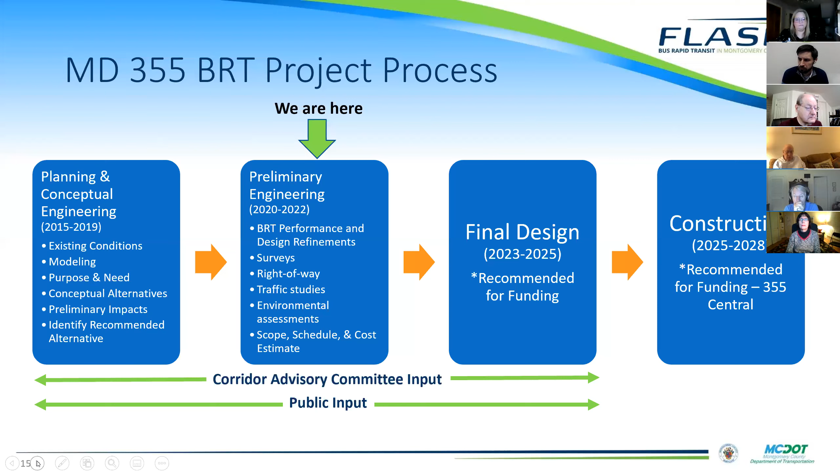So we've seen a slide a little bit like this before, and here we are in the preliminary engineering box doing all of this work - design refinements, performance refinements, the surveys, the right-of-way, the environmental and traffic analysis, scope, schedule, and cost estimate. The next two phases would be final design and construction, which we have recommended for funding in the latest budget. As I said, we will discuss this later on in the presentation.

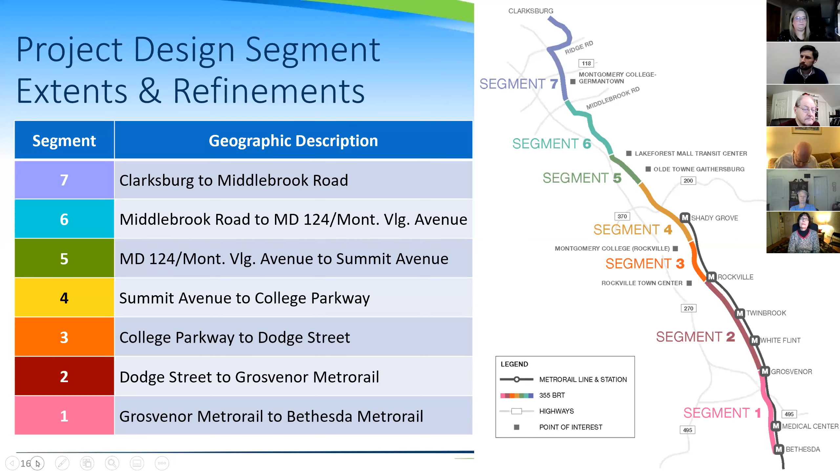So what have we been doing since last April? We've been doing a whole lot. We completed the 15% design phase in July, and we began moving toward 25% design, which is targeted to be completed in April. We completed multiple technical studies to refine the transit service and infrastructure design.

Some of the things we've worked on include coordination with the State Highway Administration on removal of some of the free right turns along the corridor. That is a charge that the county has been taking on in some of the locations to head towards the Vision Zero objective of reducing pedestrian accidents in the county.

We've also been working with Montgomery College and Montgomery County Public Schools on a transit center location near Montgomery College, Rockville. We've been working with the city of Gaithersburg regarding the Lake Forest Transit Center's ultimate configuration and coordination with a future development that may occur in that location. And we've been working out the details for the potential interim terminus station location at Montgomery College, Germantown.

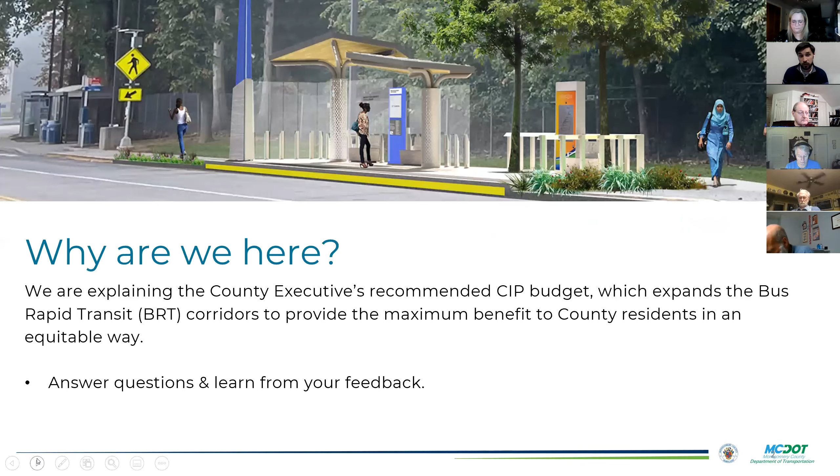There's some budget meetings that are getting ready to come up as the council takes up the county executive's recommended budget. So we wanted to spend a little bit of time tonight in advance of those meetings, walking through the recommendations in the budget and what that means for a number of BRT projects, and answer any questions that people might have. So that's why we're here. I don't think we need to belabor the point about what the flash system is. We've talked about that numerous times in previous meetings, the various aspects of the service. I think we're all familiar with that.

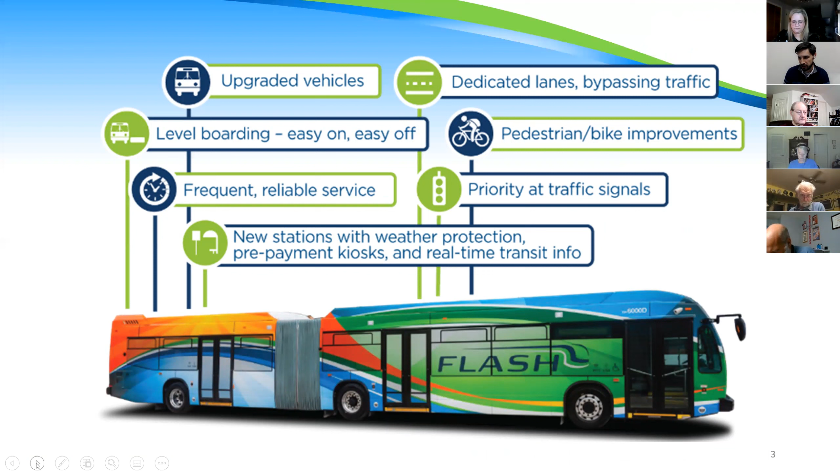In terms of the capital improvement program as it relates to bus rapid transit in the county for the proposed 23-28 budget, there's a recommendation to advance final design and construction for the Veirs Mill Road Bus Rapid Transit project, as well as the Maryland 355 Central project. We're also proposing to advance final design on the pieces of the project called Maryland 355 North and South. So the entire project is being recommended to move into final design, but only a portion of the project is being recommended for construction.

We've actually started planning. Those studies are just getting underway now, but planning is funded for New Hampshire Avenue, as well as the North Bethesda Transitway. We have funding programmed to advance preliminary engineering on what we're calling our US 29 Phase 2. This would look to get more dedicated bus facilities along the US 29 corridor and provide improved performance for the flash service that's already operating there.

There are also two related efforts happening in the county. One is called the Great Seneca Transit Network. This is a network of routes that would connect the Shady Grove Metro with the Life Sciences Center, the universities at Shady Grove, and areas around Shady Grove Adventist Hospital that were supposed to be served by the corridor cities transitway that just isn't moving very quickly. So this is an interim solution to provide improved service to that part of the county, and we have received design and construction funding for the first two routes of what would be a 4-route network over there.

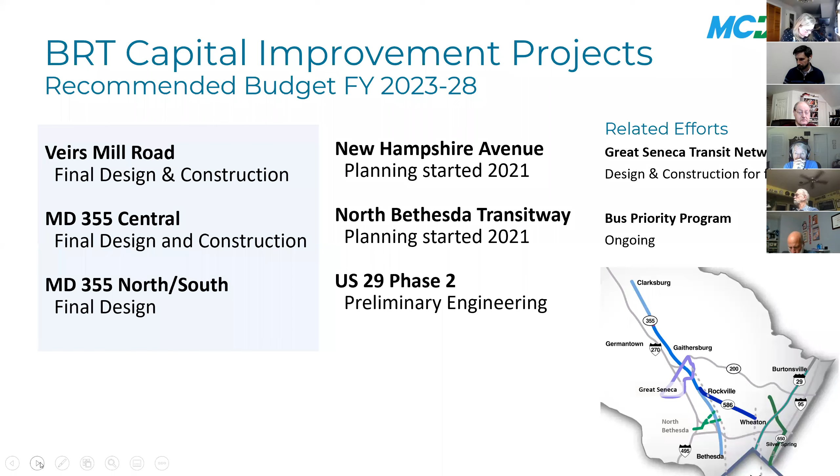So I'm going to start with just kind of an overall project benefits of what we see coming out of the budget recommendation, focusing specifically on the Maryland 355 Central and the Veirs Mill Road projects. These projects together will improve access and link key locations and activity centers, including Montgomery College campuses, a number of high job centers, healthcare locations, housing, as well as Metro Rail and MARC train. They'll serve existing communities as well as strengthen connections to areas that are planned for future growth that is planned for transit-oriented growth.

The recommendation does align very closely with recommendations that are coming out of the draft corridor forward plan, as well as the Veirs Mill corridor plan and the county's climate action plan in terms of the services that are recommended in those documents.

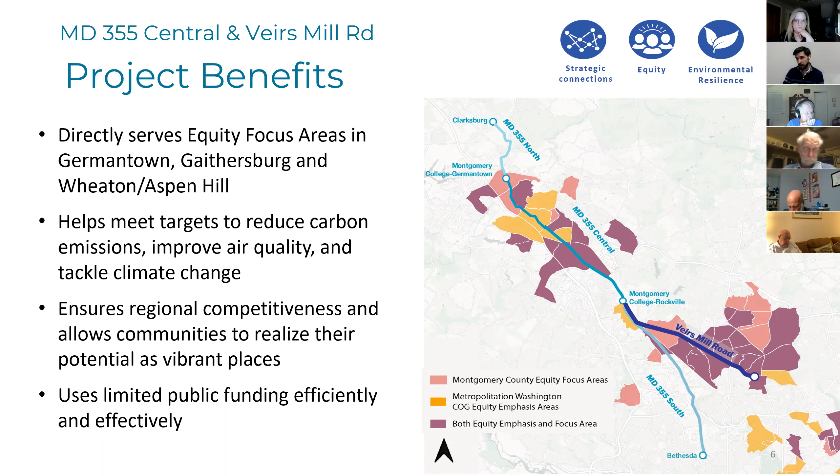Both the Veirs Mill Road and the Maryland 355 Central project directly serve equity emphasis areas in the county around Germantown, Gaithersburg, Wheaton, and Aspen Hill, as you can see on the map displayed here on the right. The projects will help the county meet its targets to reduce carbon emissions and improve air quality, as well as tackle climate change. It helps ensure regional competitiveness and allows communities to realize their potential as vibrant places. And as we'll see in a couple of slides when I walk through the various funding sources that are proposed, it uses limited county public funding efficiently and effectively.

I know this is a 355 CAC meeting, but this project does overlap with the 355 corridor for a small portion. The recommendation is for final design and construction of the Veirs Mill Road BRT, which will connect Wheaton and Rockville, tying into both lines of the Metro Rail Red Line. We'll look to improve travel time through signal priority, dedicated bus lanes, and queue jumps along the Veirs Mill Road corridor.

As I'd mentioned previously, it does border a number of equity emphasis areas in the county with a concentration of zero-car households, and the corridor carries the top metro bus routes in the county. The project, just like the 355 project, is looking to increase safety and access by removing free rights and redesigning some major intersections along the corridor to improve safety, as well as adding new bike and pedestrian connections by combining this project with our Veirs Mill Road BiPPA.

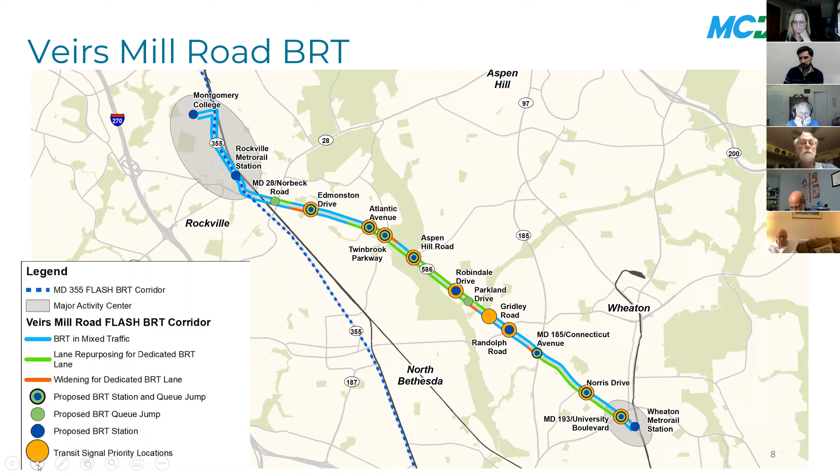This is just a little bit more detail about the Veirs Mill Road project. You can see the areas identified for dedicated bus lanes through repurposing of shoulders, queue jumps, and transit signal priority.

So the 355 BRT, as I mentioned, we're looking to advance final design on the entire 22-mile long corridor as soon as we complete preliminary engineering. There is funding for construction on what we're calling the central section of the project, and I have a slide on that coming up here.

To do dedicated lanes, again, where feasible, through a combination of 2-lane segments as well as single-lane median segments. There are some areas where there are no dedicated bus lanes, and the bus would run in mixed traffic. These are areas where the constraints are just too limiting to widen the road further, primarily in the southernmost sections in Bethesda, or in areas where the congestion is lighter and not warranting an investment in dedicated bus lanes.

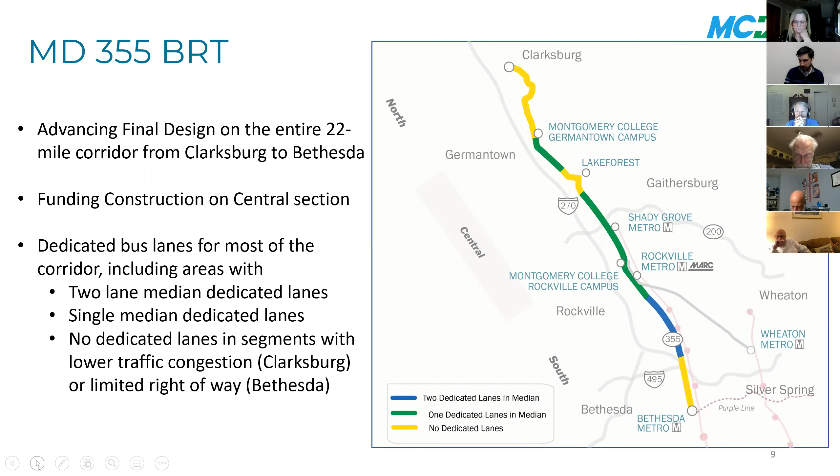So the 355 North and the South are combined into one capital program for the time being. The north would be the piece north of Montgomery College in Germantown up to Clarksburg. The southern portion would be from Montgomery College in Rockville, south to Bethesda. So we would be advancing final design on both of these segments, assuming completion of preliminary engineering.

And the reason that these two pieces are not funded for construction is there are limited funding dollars available for construction. Given the project complexities that we see in the south, as well as the still emerging land uses in the north, we feel the greatest benefit of those limited construction dollars are in the central portion of the corridor.

The county is continuing to look for additional revenue streams to fund construction. So by advancing final design, we'll have the projects ready once those additional construction funds can be identified. In the interim, the plan would be to redeploy the Ride On Extra service to better serve the southern portions of the corridor, and also look for opportunities to implement new express buses to connect those commuters up in the north to the Metro.

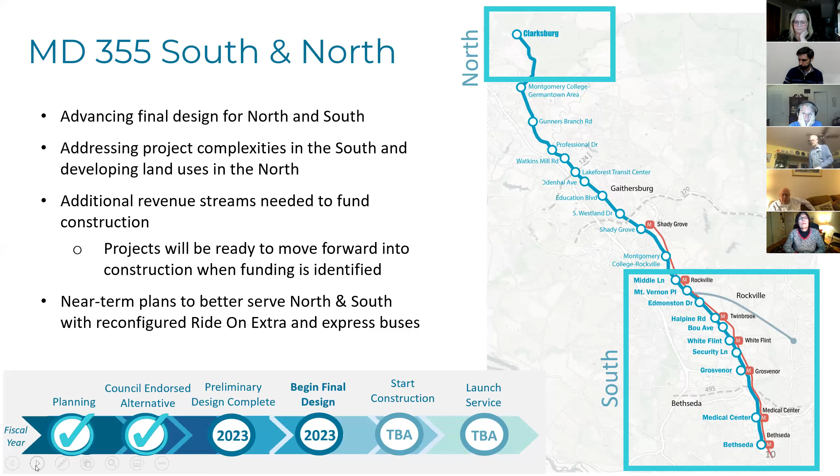The 355 Central project would look to advance final design and construction on what is an approximately 10-mile long corridor between Rockville and Germantown, with the various bus lane configurations that I showed on the previous slide. This area runs through a number of equity emphasis areas in the county and has a concentration of zero-car households, as well as the highest existing ridership for Ride On, which is the Route 55. It would expand connections to job and healthcare centers, 2 community college campuses, as well as the MARC train and the Metro Rail for a portion of the county that's not currently served by Metro Rail.

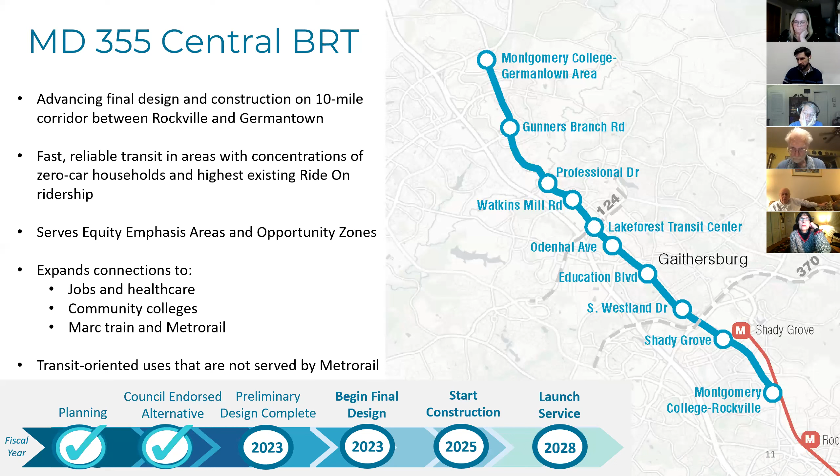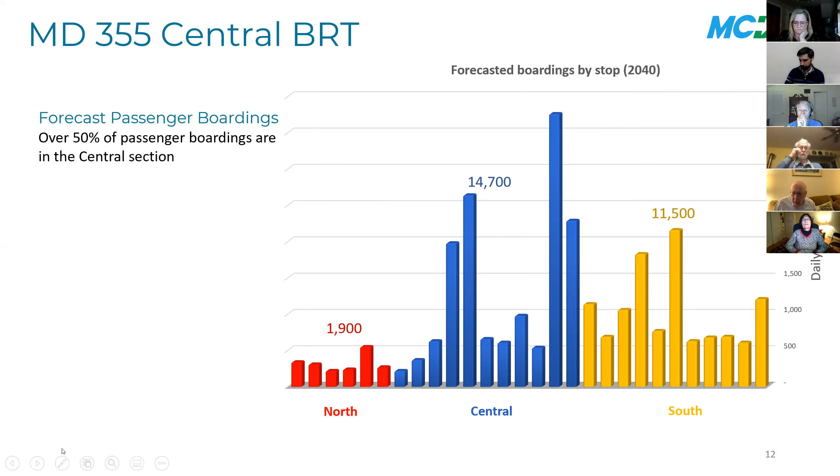Just a little bit of the data that's backing up these decisions. So when we look at the forecasted boardings for the BRT routes and break it up into the 3 segments that have been identified, what we see is that over 50% of the boardings are forecasted to occur in the central portion of the corridor. The remaining 40-ish percent would occur in the south, and then about 9% occur in the north. The other thing we see is when we actually look at the passenger loading.

This is a little bit different than just straight boardings. This is looking at how many people are riding the bus at any given location along the corridor. Not surprisingly, we see passengers boarding the bus as the bus leaves the north. But what we really see is that when you hit the central section, and really around Lake Forest Mall, we see a massive increase in the loading of people getting on the bus. Then again at Shady Grove, not surprisingly, when people transfer to the Metro to then access the broader region, we see a drop. Then departing Shady Grove Metro and heading into Rockville, White Flint, and Bethesda, we see kind of a static level of ridership. So these would be people getting off and on in the corridor, doing intermodal trips, connecting to destinations, in between Metro stations.

But there's a static, steady level of ridership. Still critical and important to serve, but not nearly as high as the demand trying to access the metro stations from points north that don't currently have this level of transit service.

The Route 55 is the highest ridership route in the Ride On system, and based on the latest figures from the transit division, it has almost returned to its 2019 pre-COVID ridership levels. So there's still high demand for bus ridership in the corridor. Route 46, which serves the southern portion of the 355 corridor, has about half that ridership—still strong, one of the higher ridership routes in the system, but about half of Route 55.

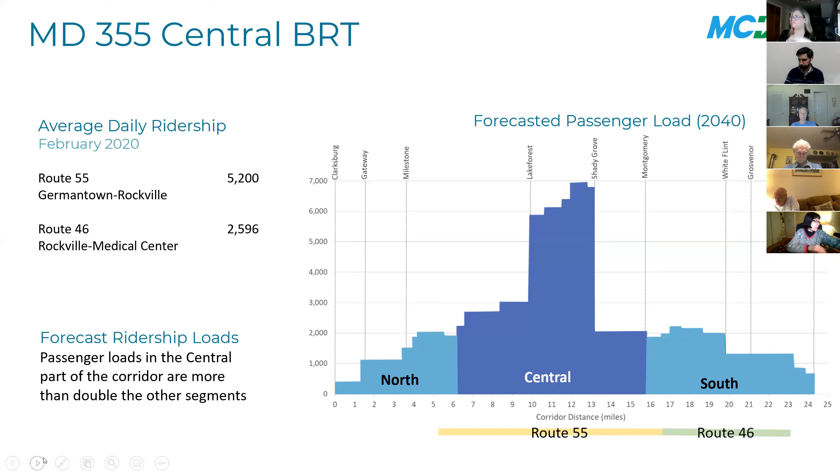A little bit about the funding sources going into the Veirs Mill Road BRT and BiPPA, as well as the Maryland 355 Central BRT. We're assuming 50% of the funds would come through federal grants, which we'll touch on next. We're also assuming agreements between the county and the state, relating to the state's opportunity lanes or toll lanes project on I-270, which commits funds toward high priority transit projects in the county, would fund the majority of the other portion. There are also some other local and state sources tied into these projects. But the primary share would come from outside county sources funding these two projects, with the Veirs Mill BRT and BiPPA project at about $94 million, and the 355 Central project at about $314 million.

The federal grants come from the Federal Transit Administration's Capital Investment Grant Program. There are two primary grants we'd be seeking: New Starts and Small Starts. The requirements for each are tied to project costs and project type. New Starts requires that 50% of the project be in dedicated bus lanes, which the Veirs Mill project would not meet. However, the Small Starts program doesn't have that bus lane requirement, and projects submitting for Small Starts funding must be under $400 million, but not seeking more than $150 million in the federal share.

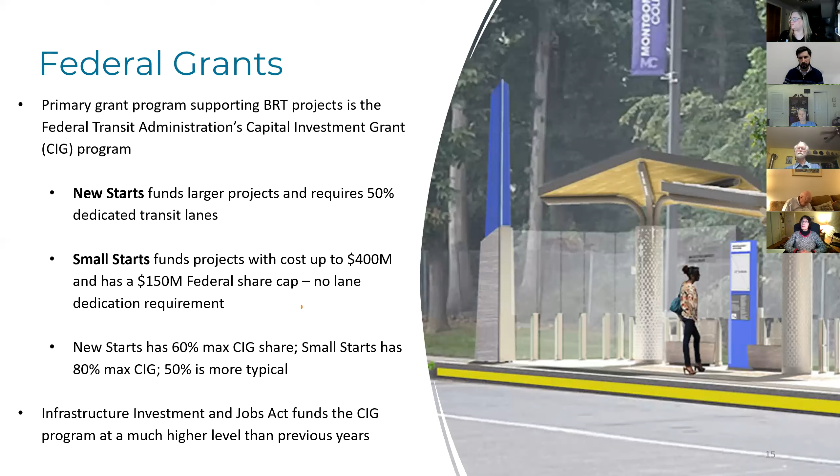In terms of the Maryland Opportunity Lanes, Maryland DOT has committed funds to support high priority transit projects in Montgomery County, an arrangement agreed to between the two parties. The initial funding amount is $60 million dedicated toward design and permitting of these projects at financial close of the deal between the state and their concessionaire, who would design and build the toll lanes. They've also committed $300 million over the contract horizon, which is 50 years. We've assumed, with our budget office, that we would seek that $300 million upfront through a financing arrangement with the state, giving a net present value of about $110 million. So roughly $170 million total would come from the Opportunity Lanes project.

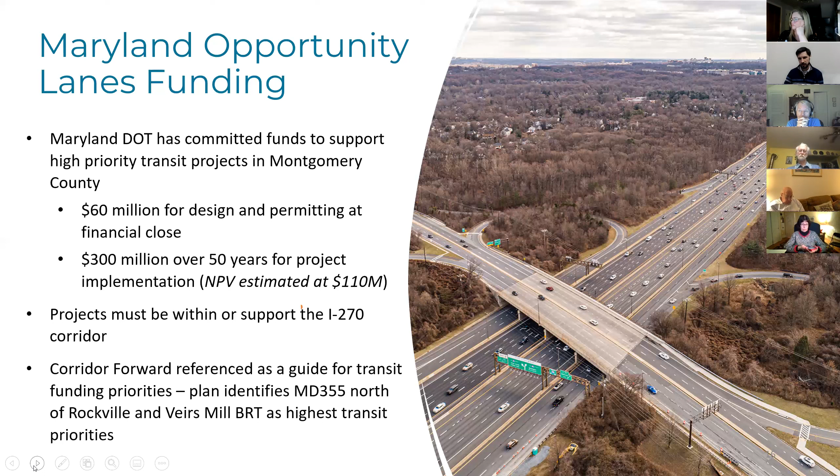The requirements for that funding are that projects must be within or support the I-270 corridor. The project also references the Corridor Forward Study, Park and Planning's I-270 transit plan, as a guide for funding priorities. That plan identifies Maryland 355 north of Rockville and the Veirs Mill BRT as the highest transit priorities in the county for this corridor, which aligns closely with the CE's recommended budget.

So just a quick summary: the capital budget for 23-28 would bring fast and reliable transit to areas with proven demand as well as need. We would be maximizing non-county funds for the greatest benefit. And the way the schedule is laid out, it would allow for completion of these two projects within the 6-year time frame of the capital program.

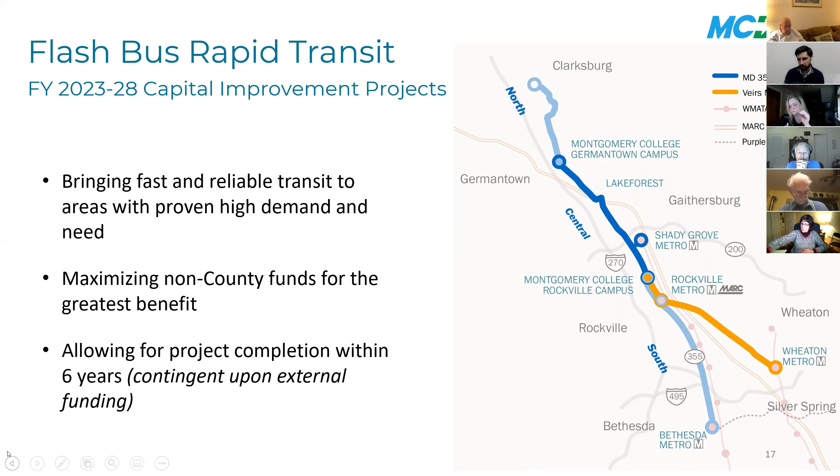In terms of next steps, there are council hearings scheduled for next week, February 8th and 9th. I believe there are two times scheduled for the 8th and a single time scheduled for the 9th, where the council will hear comments from the public and anyone that wants to share feedback on the budget. There's also council hearings scheduled on both the Corridor Forward Plan and the Opportunity Lanes funds for February 15th that are open to the public. The various council committees will take up the budget over March and April through work sessions, and the budget will be finalized in May.

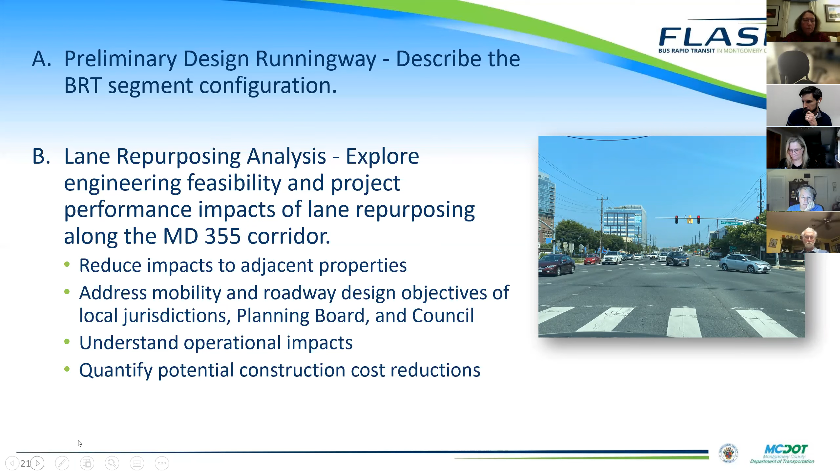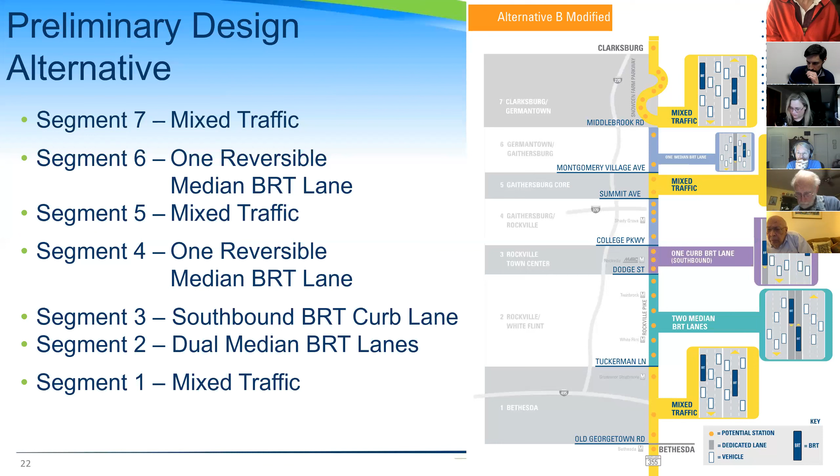Corey touched on some of the configuration earlier, so I'll try to keep it brief, but back to the prelim design: we're developing a 25% submission for the configuration shown to the right on this slide. It's an updated version of alternate B modified from the study phase. As mentioned before, segment 3 was switched from a median BRT running way to a southbound dedicated curb lane due to concerns from the city of Rockville with impacts to proposed development along their portion of the corridor. In segment 5, we switched from a single median BRT lane to BRT and mixed traffic because of concerns from the city of Gaithersburg for impacts to existing homes and businesses in that portion. I won't read off all the various segment configurations, but pretty much everything else has stayed the same except the route in segment 7 has adjusted slightly, and we've tweaked throughout the corridor where we've had constraints crop up during design. Next slide, please.

Moving on to lane repurposing. On the right is a schematic of the BRT configuration that we analyzed with a traffic model and to develop estimated construction costs. Generally, the approach was to remove 2 existing lanes along 355 through segments 2 through 6, to reduce the width of proposed construction along the corridor, while segments 1, 5, and 7 remained mixed traffic.

A change from alternative B modified is that we switched segments 4 and 6 to 2 median BRT lanes, since we wanted to take away an even number of existing lanes. For preliminary results so far, segment 2 has the most potential reduction in construction cost, with the other segments having much less potential savings.

There was also a significant increase in vehicle delays, and the number of acceptable intersections throughout the corridor dropped significantly with the lane repurposing analysis. Through segments 2 through 6, there are about 77 intersections total.

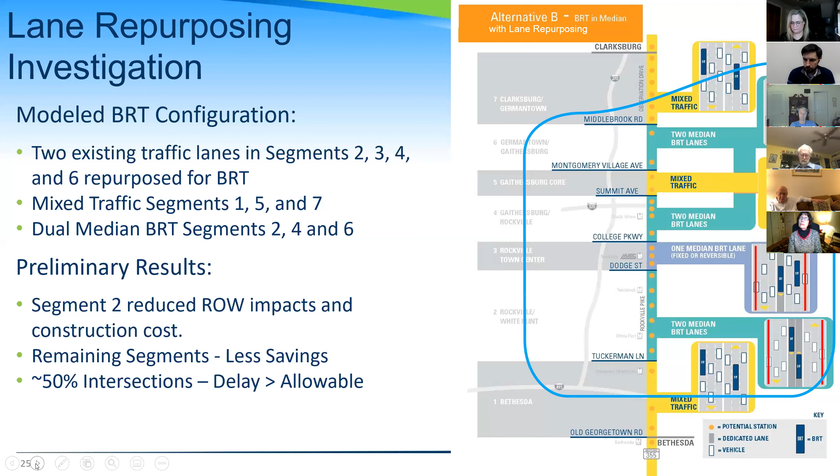We're continuing this investigation; we still have some work to do. One item we're looking at is the mode shift required to bring up the number of acceptable intersections or reduce the delays in the corridor. We're trying to determine if that number is reasonable — can we truly expect that people would shift from their cars to transit, walking, or biking along the corridor?

Based on some input from Park and Planning, we're trying to determine the average trip delays for typical trips along the corridor, since potentially I-270 isn't where you would head — it's more local traffic traveling along 355. Lastly, we're evaluating potential diversion routes for traffic, such as I-270, and how that could maybe reduce traffic on 355 with lane repurposing.

I think that's it for me.

I don't know if Randy is next or if Denny's next with next steps. Sorry — can you move to the next slide, please? But if we want to stop and answer any questions about lane repurposing, go ahead.